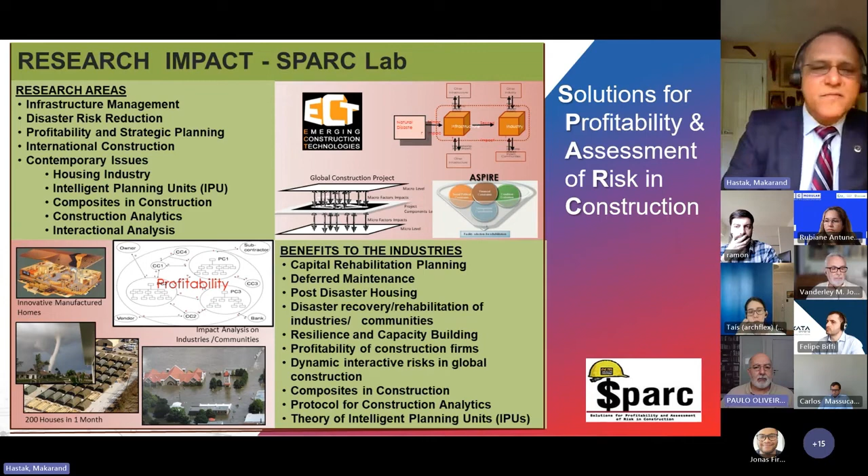Composite applications in construction, construction analytics, interactional analysis. A lot of these research, mostly in the housing industry, intelligent planning units, composite applications, leads to more modular construction. So we have dealt with that quite extensively over the past years. As you can see, a number of benefits have come out of this research. But this is just showing primarily all the areas that I've worked in.

But today, I would like to share with you some of the results we have in terms of people, process, and technology roadmap for offsite modular construction, and a theory that we introduced a few years back called the theory of intelligent planning units, which I believe would be the next stage of modular construction, and something that we can all think about.

Talking about CII, perhaps many of you already know, but CII stands for the Construction Industry Institute. It is based out of UT Austin, University of Texas at Austin, and it was started in 1983 by some of the faculty, who got together with the industry, and the idea was to do research for the industry and identify what are some of the issues that the construction industry might be facing, and how can we resolve that. So there's industry partners, there's of course academia and the government, and they identify research needs, research topics, and then as academics we bid on those projects, and if successful, then you engage in at least a 2-year project with about 20 different companies on your team.

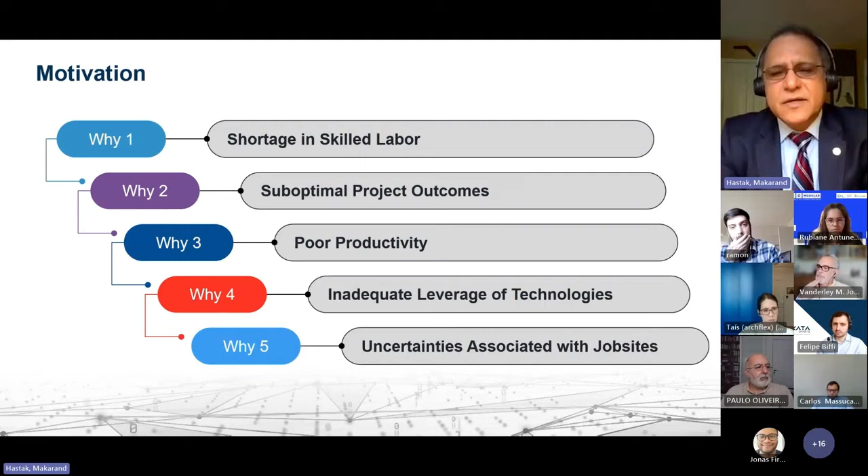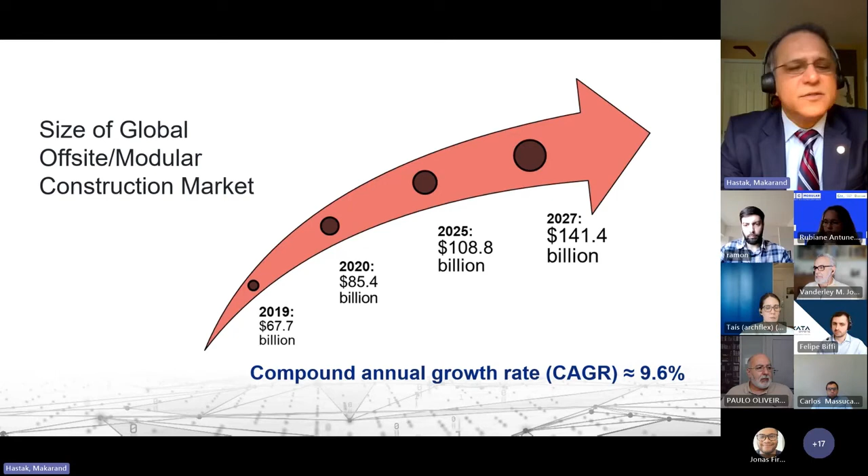The good part is that the size of the global offsite modular construction market has a very positive trajectory, as you can see, where the compound annual growth rate is almost 10%. So that is indeed excellent, and from the positive trajectory, you can see that that trend is likely to continue. And I'll talk about some of the reasons that we found why that trend is also important for us in the industry.

As I mentioned, we started this research shortly before the pandemic, and then we were meeting as a team. I had about 18 or 20 different companies represented on the team, and we had to meet online like we are doing now, and try to complete this research project.

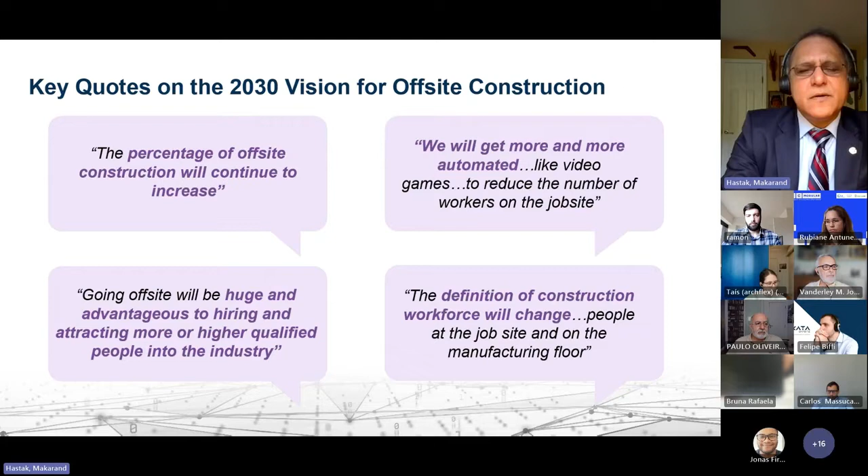So we are talking to different companies, different owners, and different contractors that have used modular construction. And as you can see, their vision for 2030 for offsite construction. And again, it was overwhelming response that in the future, because of all the issues that I mentioned earlier, including skilled workforce requirement for offsite construction, improved productivity, that we will see more and more of offsite construction as we move from 2020 to 2030. So indeed, a very positive indication for this segment of the construction industry.

So in conducting the research, we went through a lot of the typical steps that we would expect, and that included literature review, of course, what has been done. I mentioned about CII having done a lot of research over the past 30 years. We did a survey of all the experts in the industry. About 100 responses were received from companies of different sizes, vendors, owners, contractors, suppliers, and manufacturers, of course. Then we did also semi-structured interviews of a select group of professionals. We did case studies on top of that for application of modular construction.

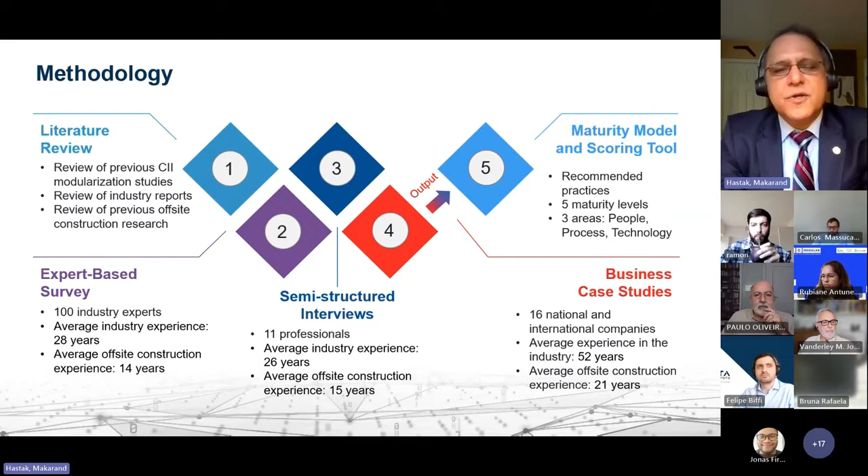And in the end, we came up with what we call a maturity model and a scoring tool that shows what is the strength of off-site modular construction as far as your company is concerned, and how you can identify how mature your company is in adopting some of these practices. The result of which was, as you can imagine, a roadmap.

And instead of just talking about people, as the title might indicate, we also looked at process and technology, because all three of those elements need to go hand in hand. And we came up with the roadmap that would indicate what would be the workforce requirements, what type of process implementations we will have to think about, and what type of technology would be needed and is currently available.

So starting with people then, let me point out the top 3 workforce occupations in the highest need for training in offsite construction. And you can see that we identified 5 different categories. Those are design and engineering, construction and management, administrative, on-site craft, and then off-site fabrication. As you all know, we need to have a good strength off-site as well as on-site to make modular construction, off-site construction most effective.

So the next 3 columns you'll see are indicating the top 3 workforce occupations in that particular category. So design and engineering, for instance, BIM, 3D, 4D modeling, QA/QC, planning engineers; in construction and management, construction managers, of course, constructability specialists, field interface personnel; on-site craft, for instance, required off-site module installation personnel, lifting cranes and rigging personnel, instrumentation, and so on.

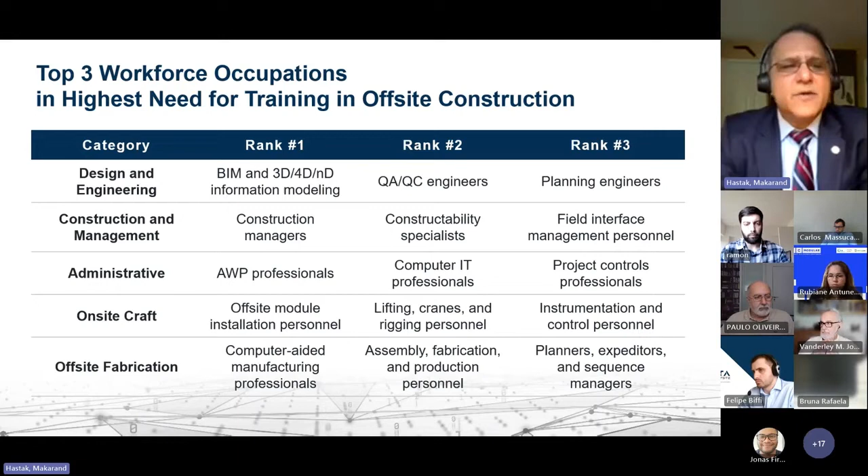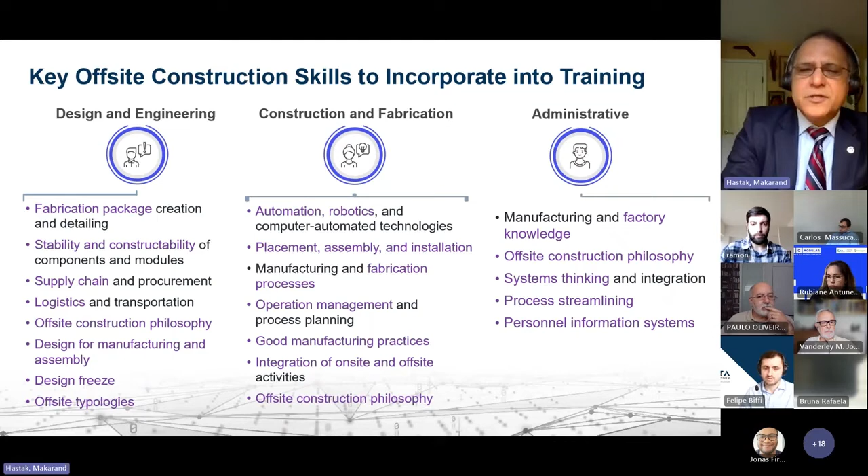So in addition to this skill set, there were some advantages. I think with offsite construction, there's more opportunity for workforce diversity. And as you can see, these are percent numbers, but you can definitely see improvement in engagement and diversity in the workforce that might be feasible with offsite construction, where we can provide a more controlled environment for the workforce and different skill sets can be attracted to the industry. So there's a lot of potential in terms of improving the skill sets and the demographics of the construction industry.

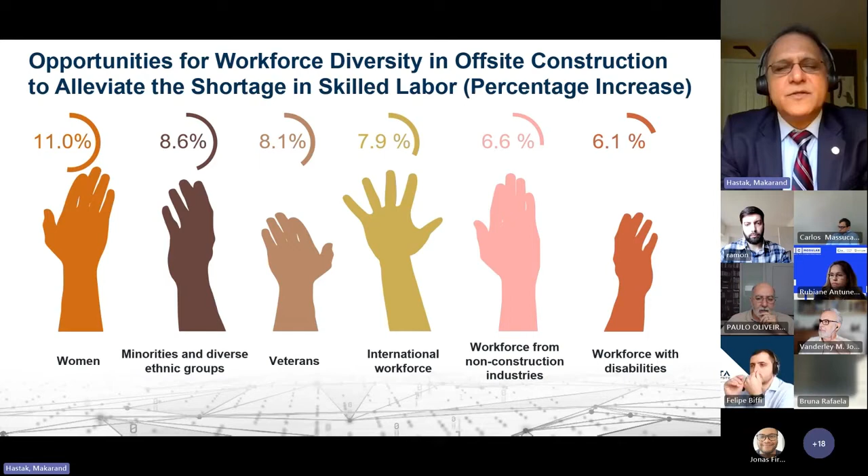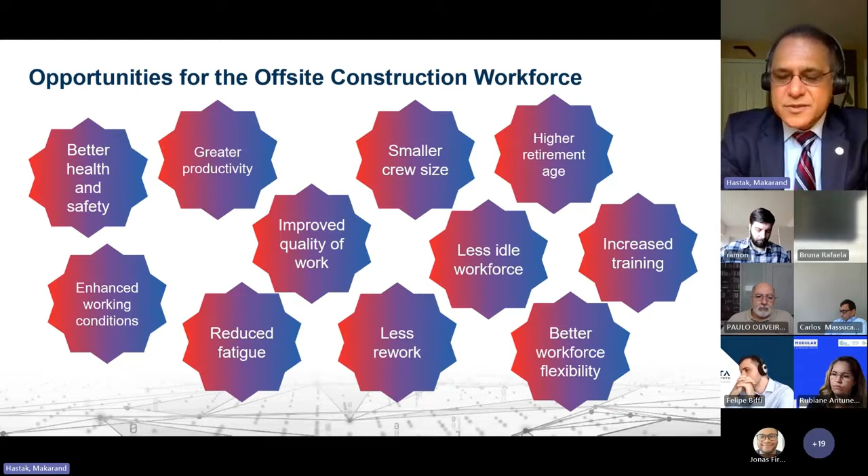Then, so what are the opportunities for offsite construction? As you can see, better health and safety, greater productivity, enhanced working conditions, reduced fatigue, smaller crew size, less rework, and so on. So I know that you all are engaged in modular construction, so many of those things, of course, you are familiar with. But let me talk about process.

In terms of process, the improvements that we found, future growth in offsite construction process from 2020 to 2030, and 2030 is not too far from now, just a few years away. But 87% of the practitioners expect an increase in offsite construction. There will be a 21% average increase in offsite construction, and about a 7% average increase in fully automated offsite construction activities. So definitely much more emphasis on offsite modular construction is likely to be seen by the time we hit 2030.

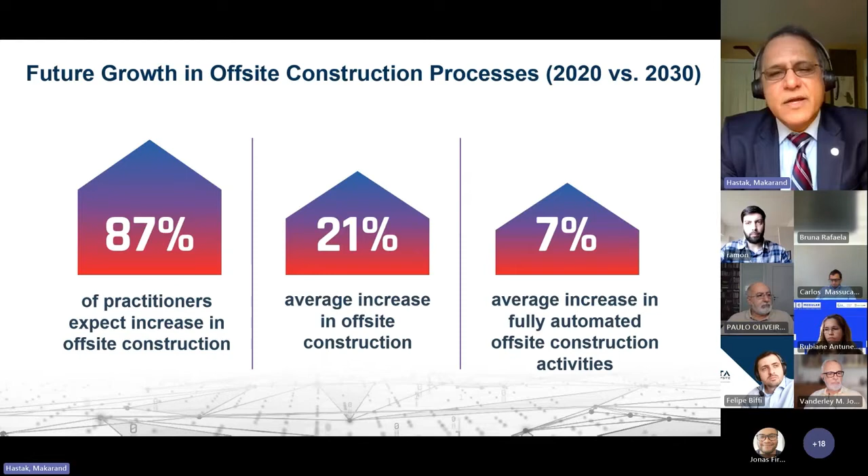You might also know that, by 2030, we are expecting to lose about 41% of the construction workforce in the United States. And with the pandemic already influencing availability of skilled workforce, and by 2030, if we're going to lose 41% of the workforce on top of that, that is a serious consideration that, at least in the United States, we need to be thinking about in terms of what changes we need to implement so that we can take more advantage of modular and offsite construction.

So what are the different characteristics? In 2020, we focus more on single trade, prefabrication, customized components, permanent structures, single skill labor, high skill labor. But by 2030, it's likely to be more modularization, standardized components, portable, relocatable structures, multi-skilled labor force, and high-skilled labor force. So clearly, the training requirements, if we now think from an academic perspective and from a training workforce perspective, we will have to think about how we can train these individuals so that it becomes seamless.

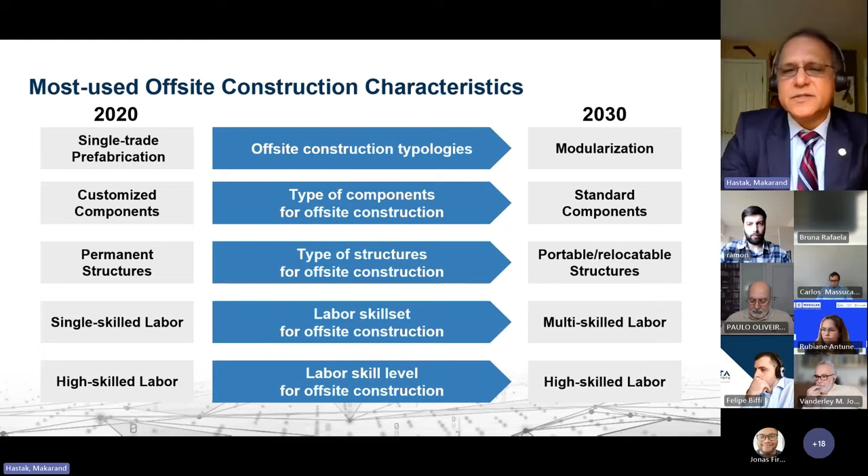As modules are created in the factory environment or offsite environment, and as they come to the work site, we almost have a plug and play type of design so that it becomes seamless in terms of constructability and making facilities feasible. So, there are a lot of lessons to be learned. There are certain lessons, and of course, there are pain points as well.

And the lessons learned, of course, are, we get an experienced integrated offsite team. That is a requirement. Adapt and work within the offsite framework. So our philosophy needs to be a complete offsite construction thought process. We need to provide basic training for the workforce. Of course, reward and incentive mechanisms for the offsite workforce as well.

But some of the pain points would be, currently at least, immature processes, inconsistent implementation of offsite construction. If the offsite philosophy in a particular organization is not robust, then they're likely to still be thinking on-site construction and wanting to implement a few modular components. And that defeats the objective of moving construction offsite. So lack of detailed offsite design solutions, of course, late offsite construction decisions that might delay the lead time, might delay the supply chain process, and so on.

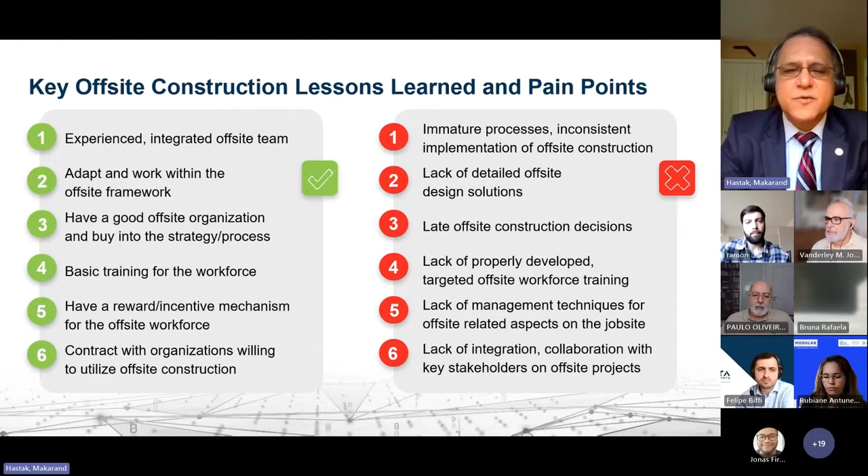So clearly, the benefits are plenty, and you all know those very well. So in terms of workforce, 50 to 60% of stick-built can be moved to offsite construction. Labor costs can be reduced. We might expect improved productivity because of the factory environment. We can reduce safety incidents. Quality could be improved as well. Less disruption, and perhaps more saving in time also.

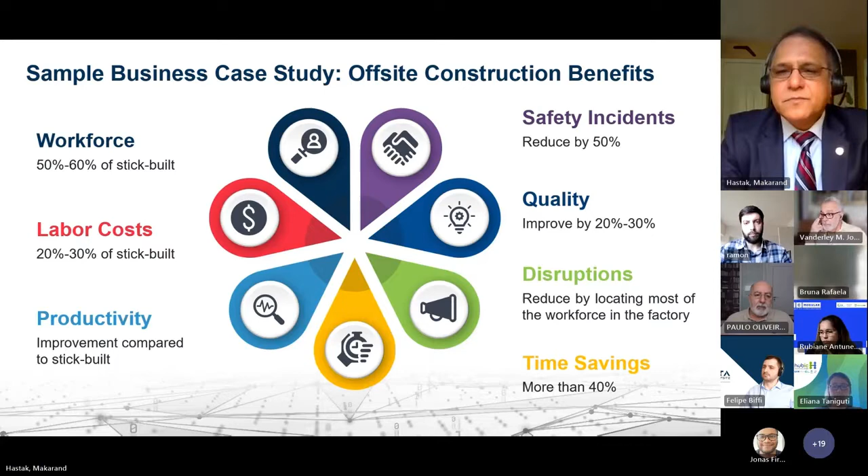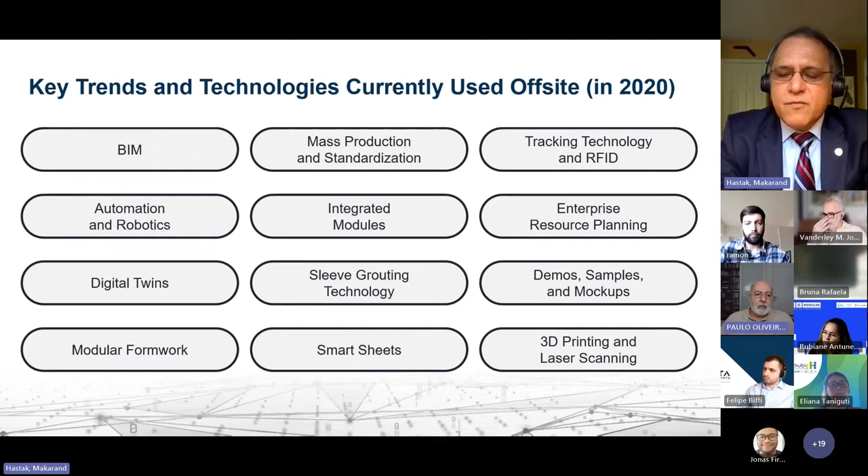But what we found also is that by 2030, the technologies we are likely to see more would be remote monitoring, use of smart sensors, use of artificial intelligence interface, extended reality, integrated real-time management information systems, and a few more. So the question that comes to mind is, is our industry ready? We went through Industry 4.0 or Construction 4.0, but there's also Industry 5.0. So how is that to be integrated when we're thinking in terms of modular construction moving towards 2030?

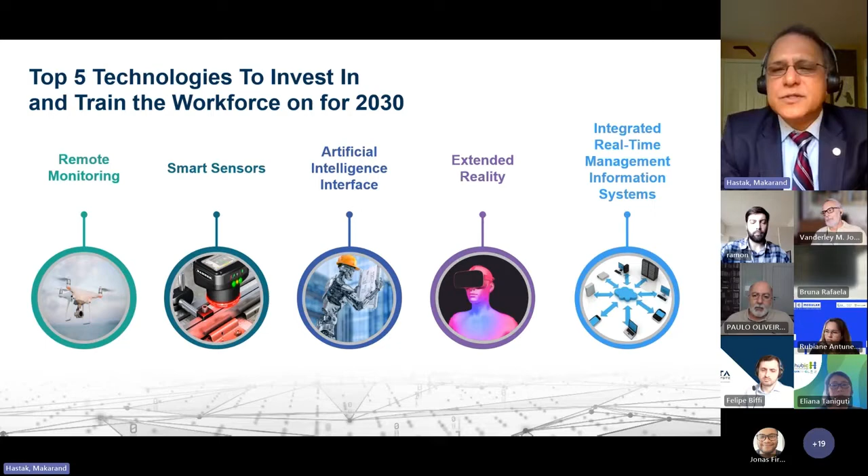So what we did was we came up with a maturity model and a scoring tool to assess where we stand at present in terms of modular offsite construction. And I'll quickly share with you what this maturity model is. There are 5 levels. Initial level, 6 months to 1 year into implementation of modular or offsite construction. Repeatable, defined, managed, optimizing. So these are the 5 levels a company would go through in implementing the offsite philosophy, modular philosophy, within their thought process.

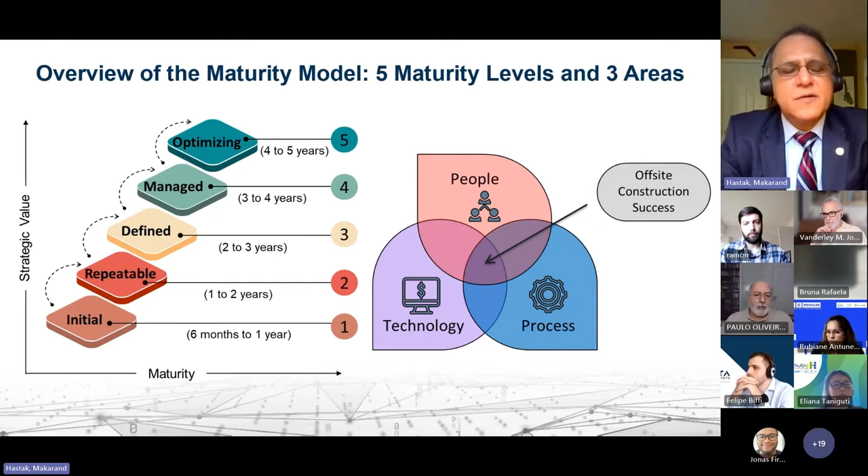And indeed, looking from 3 perspectives, as I pointed out, people, process, and technology, and how mature our organization is in terms of implementing some of the offsite philosophies. So in terms of the meaning of each of these maturity levels, at the initial level the organization has its offsite construction development disorganized, and as you move further up the scale, level 5, for instance, the organization realizes the full offsite potential and constantly looks for improvement. So that's the range in which we have designed this maturity model.

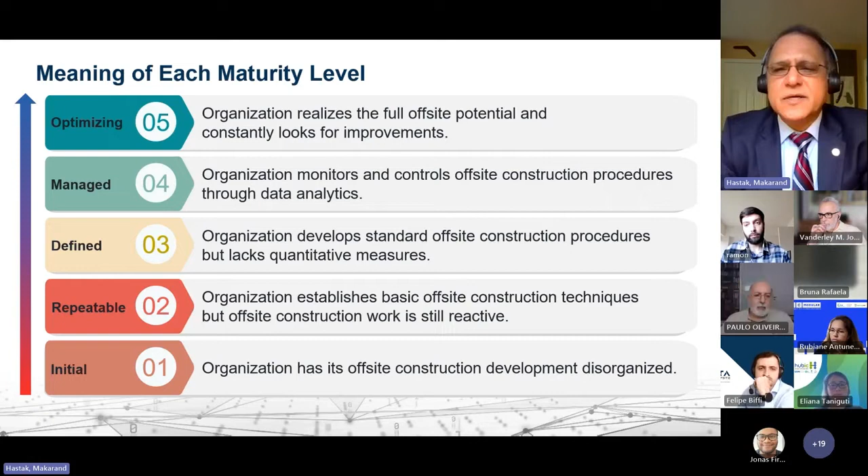If you look at some of the attributes, again, under the 5 maturity levels of initial, repeatable, defined, managed, and optimizing, you'll see the expectations from people, process, and technology as you move up the maturity level, from the initial level to the optimizing level. So for instance, in terms of people, initially you would require training, provide soft skills and technical skills to your workforce. But as you start maturing, you might have regional centers of excellence within your organization already looking at the next steps in modular thought process and how to improve your own profitability.

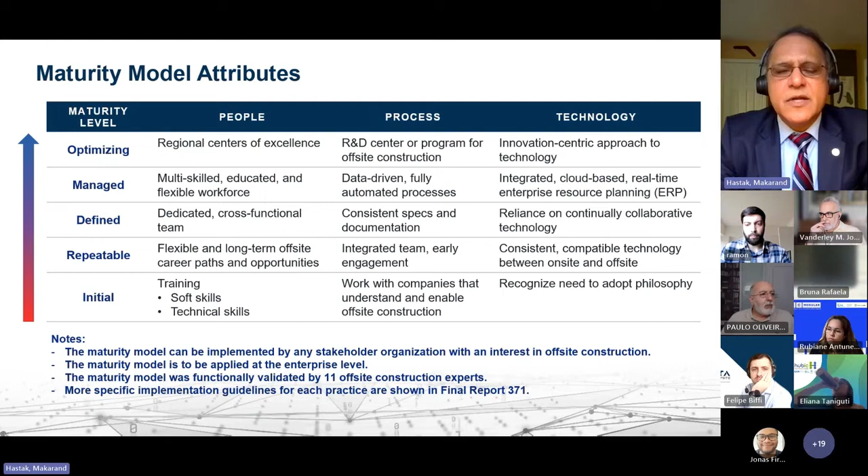In terms of process, again, starting with the initial level, work with companies that understand and enable offsite construction. You're still in a learning process, but as you mature, you might have R&D centers or programs for offsite construction within your organization or as a consortium of organizations. Same thing with technology: recognize the need to adopt the offsite philosophy, versus an innovation-centric approach to technologies, where you're not only implementing advanced technologies, but also thinking ahead of how we can make the most use of upcoming technology and research to improve profitability in our companies.

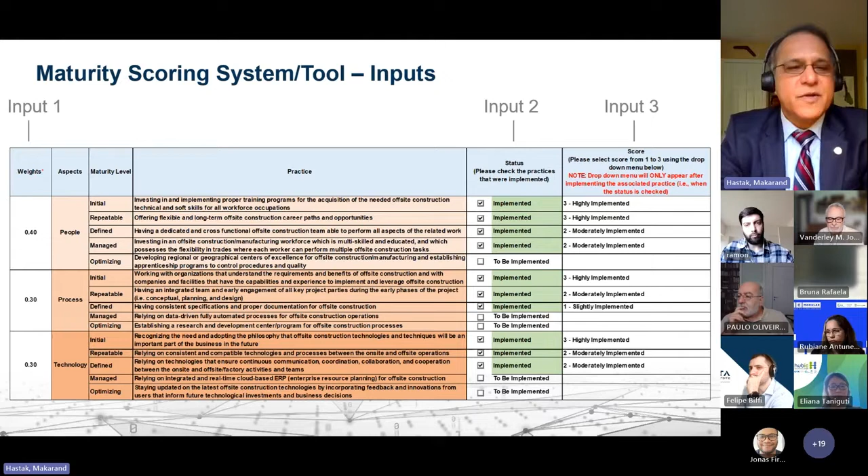Just to give you an idea, multiple inputs are required from the user. I know the font is probably too small to read each detail, but what we're looking for is different weights to people, process, technology within your organization, and input about the status of the different practices, as you can see listed there. This is just a partial listing, and then the score from 1 to 5, or from 1 to 3 using the drop-down menu, that you can scale. Where does your company stand with respect to these practices?

There are 5 outputs that we get from the model in terms of score for people, score for process, and a score for technology as the 3 important things. And the score is from 0 to 15. So the 5 stages, 3 points per stage, sort of.

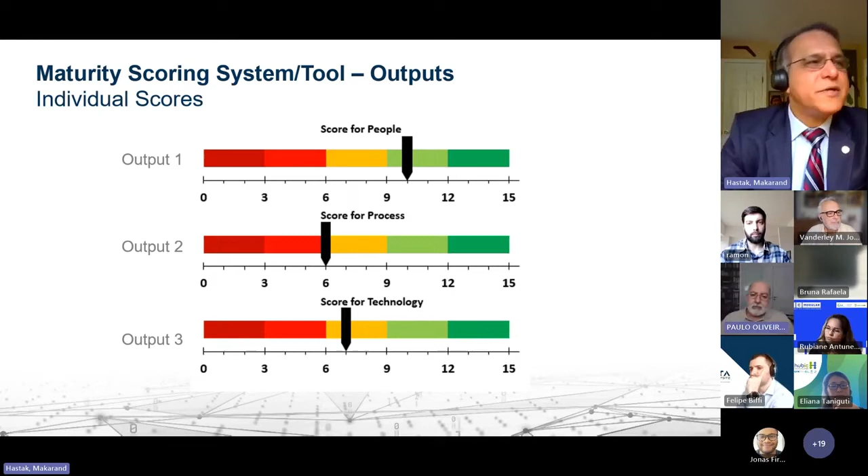So clearly there is a call for action. 2030, as I mentioned, is not too far away. So clearly we need to take advantage of the growth benefits that I mentioned. The CAGR is about 10%, and that is indeed an opportunity for all of us. Follow the roadmap to improve project outcomes. There are certainly guidelines that are coming from the industry participants. And of course, we don't want to stand still and fall behind.

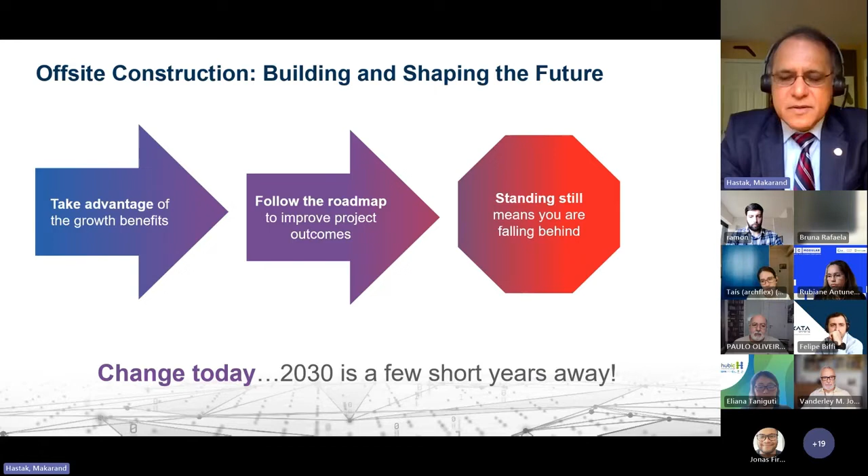Construction, as I mentioned before, is known for late adoption of technology and low productivity. So as compared to manufacturing, here is an opportunity, I believe, that we all need to adopt and move forward. A little bit about the report that I mentioned. This is the CII report RT 371. And you can see that there are 12 different elements that are covered in that report. It's quite extensive in terms of documenting where the industry stands and some of the results that I just shared with you. And if you like, please approach CII to get your own copy.

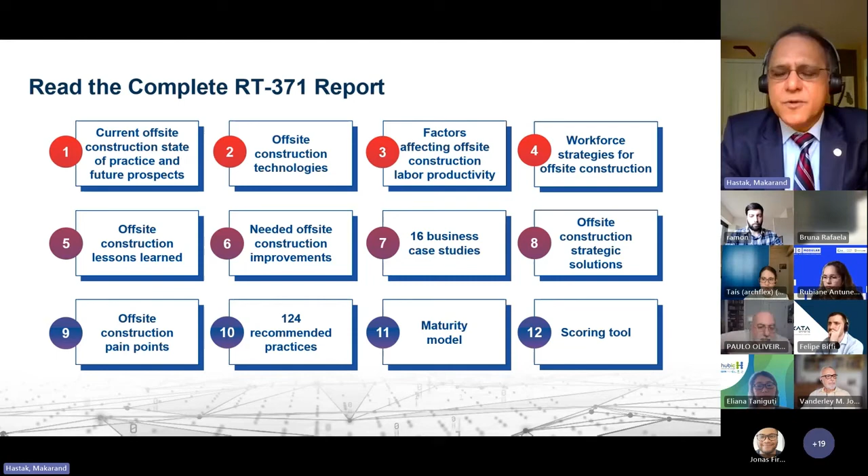But having said that, I also mentioned just a few minutes ago that so far we have reached maybe construction 4.0 or industry 4.0. But as you all know, industry 5.0 was recently introduced, which has a slightly different focus. The focus is now more human-centric, promoting talent, diversity, empowerment, resilience of the industry, and of course sustainable aspects. You are also aware of the UN Sustainable Development Goals; out of the 17 SDGs, I think about 8 or 9 of them relate very well to our industry. So I believe that offsite modular construction has a lot of role to play in achieving many of these objectives.

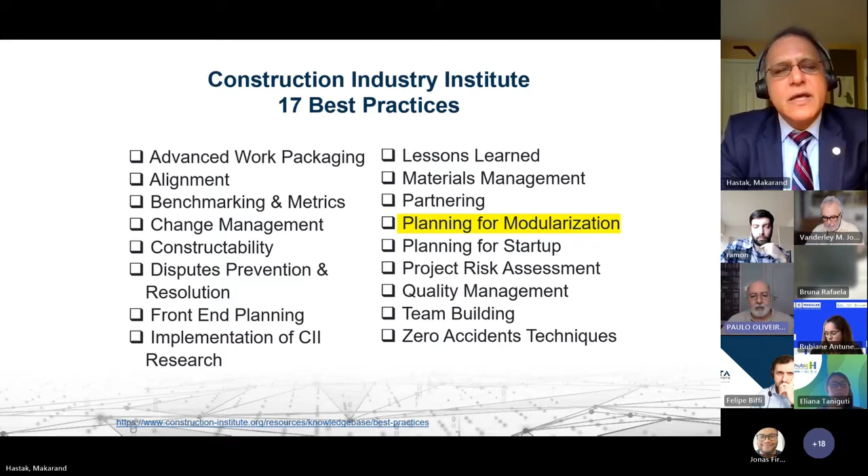But with the recent research that I shared with you, the emphasis is now all across the industry in terms of adopting the philosophy of off-site modular construction and how that is going to impact the nature of training required, the workforce requirement, and of course, the implementation of that. So, we are also engaged in research in that area. And I want to share with you a theory that we proposed a few years back. Actually, it was published in 2017, what we call the theory of intelligent planning units. And what do we mean by that? So let me walk you through what we mean by intelligent planning units and how that is going to transform our industry in terms of modular thinking, in terms of off-site thinking.

So as you all know, the dynamic nature of our business makes it very difficult to establish a streamlined flow in the construction process. It makes it difficult to optimize the required resources in terms of labor, material, equipment, and so on. Meeting the client expectation in terms of cost, quality, safety, etc., often becomes difficult. We always say that each project is different, so we start thinking from scratch. But of course, from a modular perspective, there are synergies that could be adopted from project to project. So there is clearly a need for reducing this complexity in some ways.

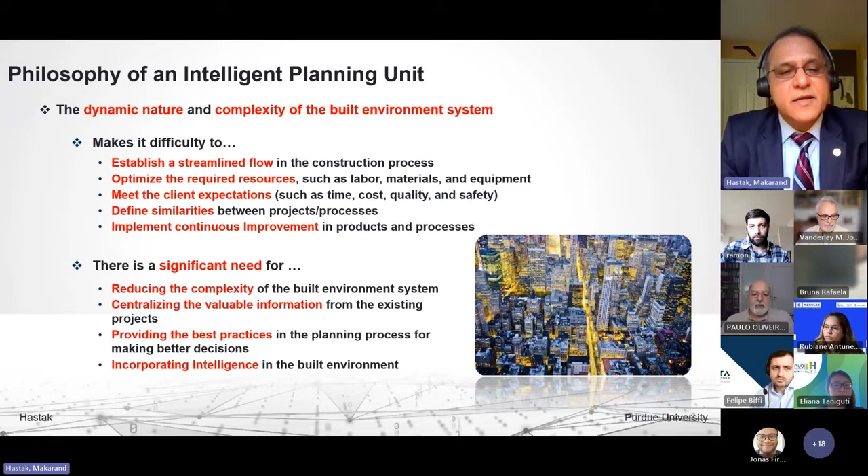It will be great if we can centralize the valuable information from existing projects and look at some of the repeatability concepts, providing best practices in the planning process for making better decisions, and then of course incorporating intelligence in the built environment. So the way it started was, we started to ask a question: how can we enable complex built environment systems to be more intelligent? What do we need to do to reduce the complexity in our business in the construction industry? So we started this research almost 15, 20 years ago.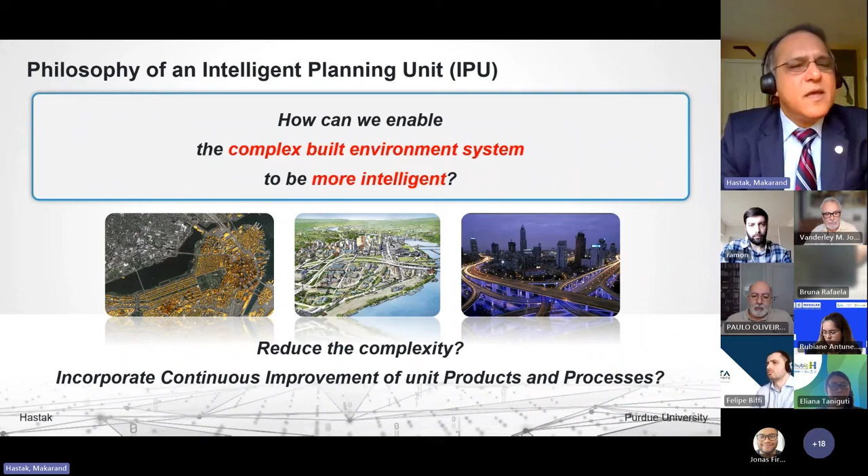And the question that we were asking was, we're looking at nanotechnology. Now, you know that nano is a billionth of a part. And we said, well, in our business, we look at big projects. We look at mega projects. So when you say nano, what does that mean for us? And if I were to ask you that question, you might perhaps say that a billionth of a part might be a brick. So if a brick is that nanoparticle for us in the construction industry, then the next question is, how can we make that brick more intelligent? What are the avenues available to make that unit more intelligent?

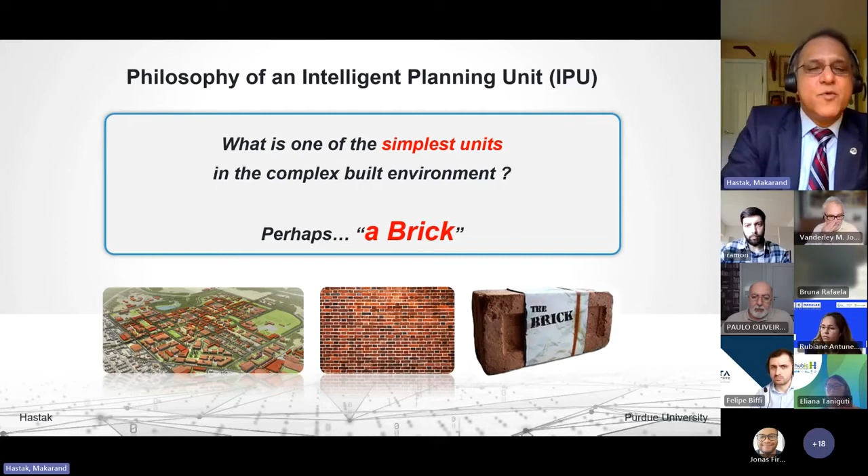And the answer could perhaps be manufacturing composite bricks that implement nanotechnology, and perhaps process optimization at the unit level, that then could be replicated throughout the organization. Now, you might say, well, what does that really mean? So let me explain that further. If you were to take that brick and implement sensors using nanotechnology, and place those bricks strategically, let's say 4 or 5 units in a room wherever you are sitting, then that room itself would be capable of identifying humidity, temperature control, sound, air quality, whatever those sensors are used for. Now, certainly that room is an intelligent planning unit.

And let's say you are sitting in your office, and in your building there are 20 such offices. Now, by optimizing one unit in terms of all the KPIs that you want, or the key performance indicators, you are preparing a unit which could be replicated n number of times.

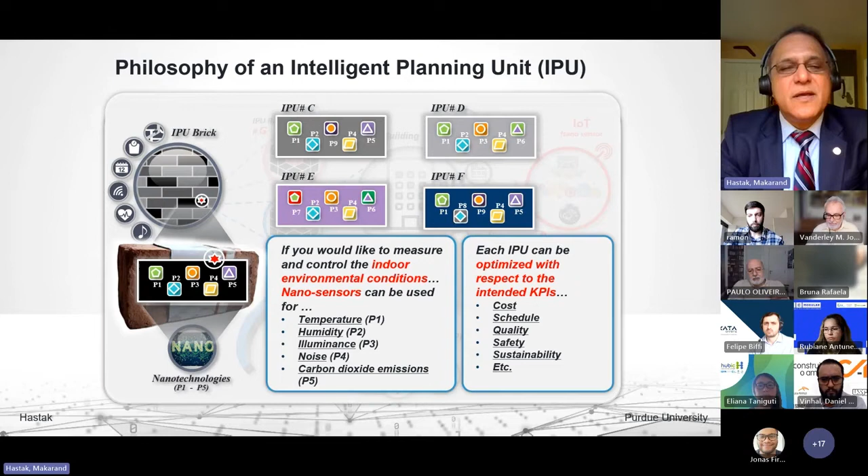So you can see that by implementing a strategic brick as a unit in a wall or in a room, you certainly have an intelligent room, which then could be expanded to a building, to a campus, to a city, to as far as you want to take it. So that is the concept in short of what we mean by intelligent planning unit. The same thing can be done in terms of process also, and I'll take some examples a little bit later to explain what I mean by that.

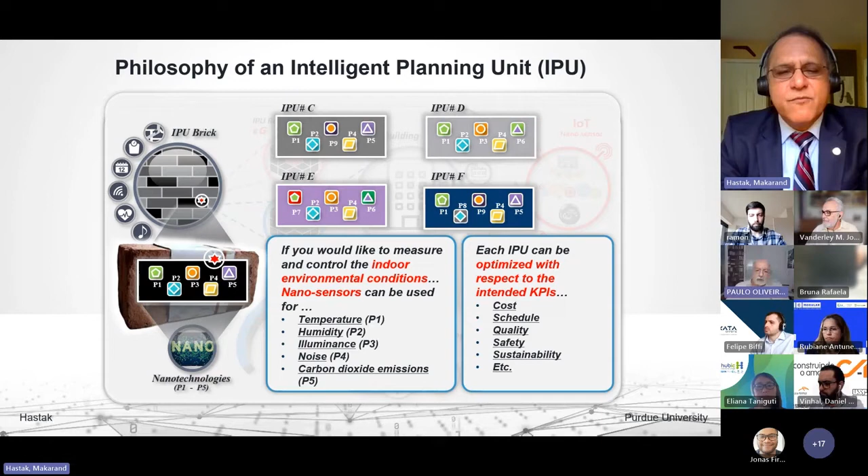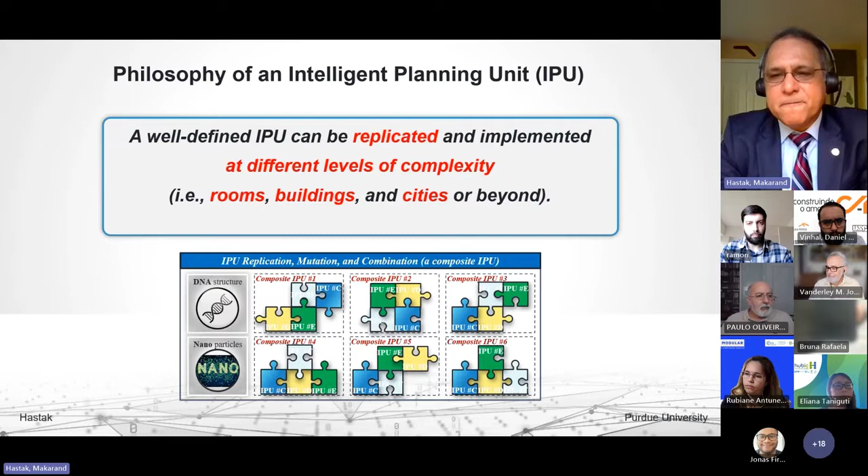So in the same way, if we can identify units that are repeatable in our facility, then by combining them, we can prepare composite intelligent planning units that can be replicated n number of times in that particular facility. So that's really the concept of intelligent planning units. IPUs can be implemented, of course, in the real world. We can improve those through a refinement process.

So if we adopt the intelligent planning unit philosophy, it's going to disrupt the industry. Now, instead of an architect designing every building from scratch, they would perhaps be thinking in terms of what kind of intelligent planning units do I have that could be provided by different vendors that can be incorporated in my building, and I need n number of one type of IPU, and I need 5 of a different type of IPU.

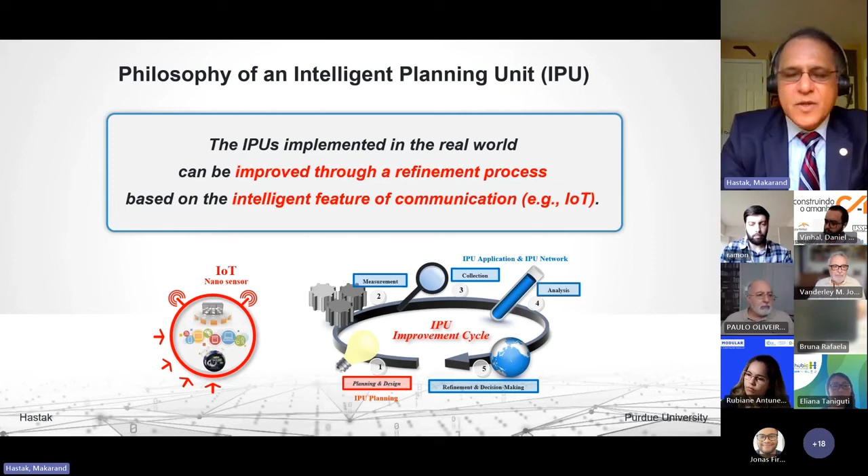Of course, when we think in terms of products, in terms of modules, we know that we can improve those modules from process to process, from one model to the next model, to a third model. So that's really the process of improvement. As I mentioned, you can scale it from a nanoparticle level to a brick to a room to a building to a city, and to any level or any scale that you want.

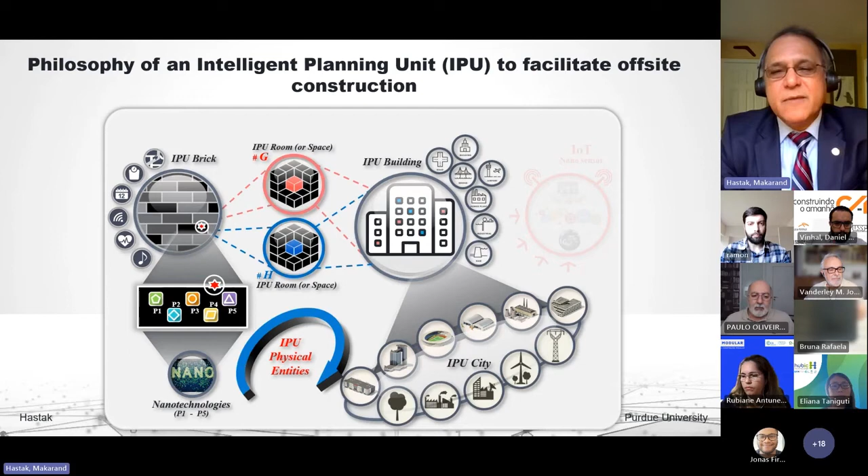What I mean by that is an intelligent planning unit could be at a nanoscale, could be at the scale of a room, could be at the scale of a building, or it could be at the scale of a campus. So these are all scalable concepts that can be implemented. And now with the help of IoT, we can actually integrate all of these modules so they can talk to each other.

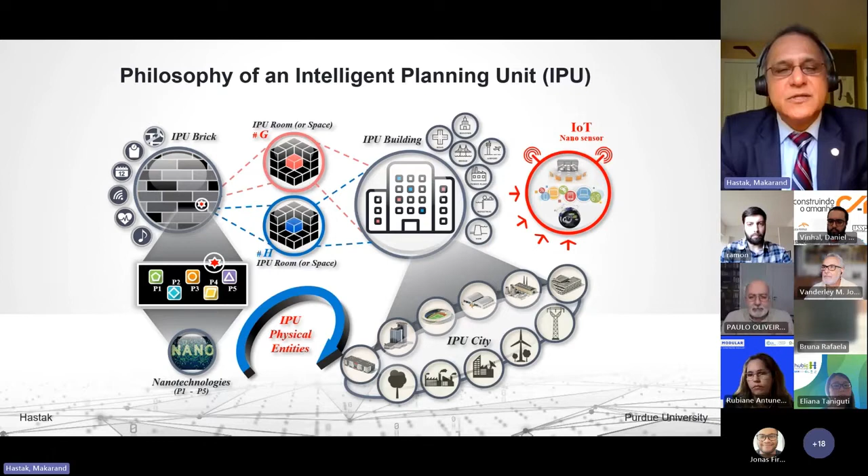For instance, if you have traffic sensors in different parts of the city, you can identify which part of the city is more congested during a particular time of the day, and how you can reroute the traffic so that there is less congestion on the roads. Or you can monitor energy consumption on a campus in different buildings, and how that energy consumption could be minimized by controlling it using IoT and this IPU concept. So it's the scalability of IPUs that is the key, as I pointed out.

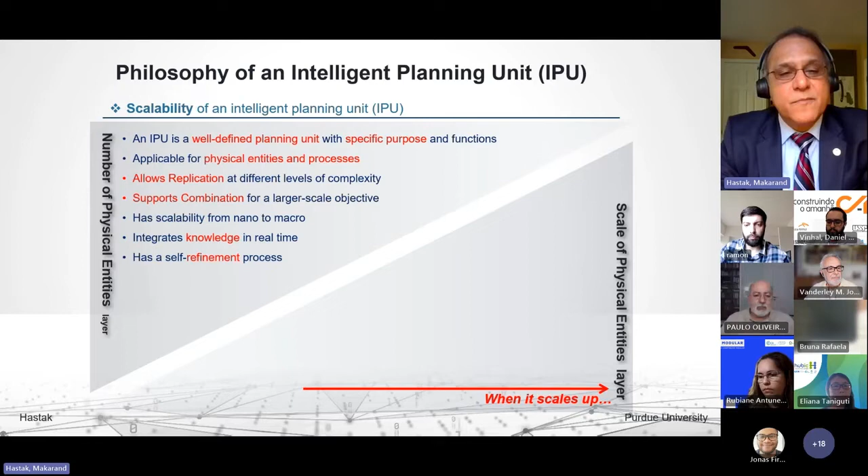An IPU is a well-defined planning unit with a very specific purpose and functions. It's applicable for physical entities, as I mentioned, as well as for process improvements. It allows replication, supports combination, is scalable, is modular in nature, of course, and can be integrated in real time, and so on. So you can scale it, as I've been pointing out, from a nanoparticle level all the way to as much as you want to scale it.

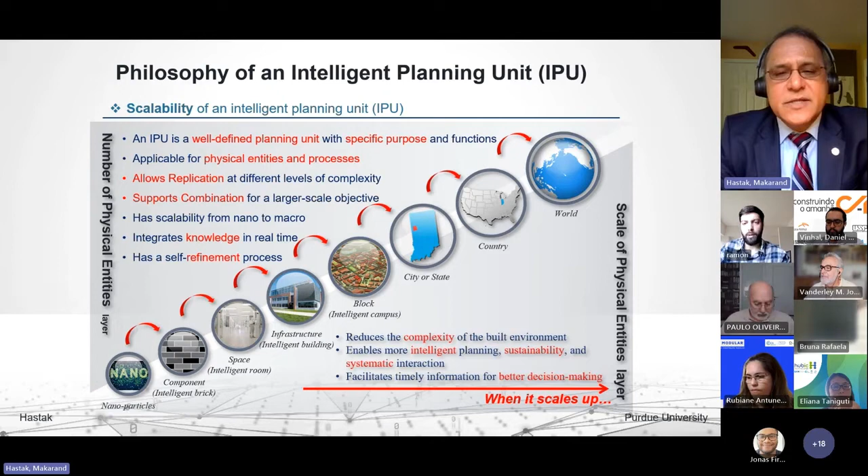Of course, when it scales, it reduces the complexity of the built environment. It enables more intelligent planning, sustainability, and systematic interactions. And it also facilitates timely information for better decision making. So how would I define an intelligent planning unit? Well, it is that physical unit or process which has been optimized in design and purpose, perhaps with sensor technology as appropriate, and can be replicated and implemented at different levels of complexity.

An IPU can be mutated. So if you look at just fenestration, for instance, if it is a south-facing wall or a north-facing wall, then you need different types of fenestration requirements, but that does not change the essential functioning of that IPU, or intelligent planning unit, as a fenestration.

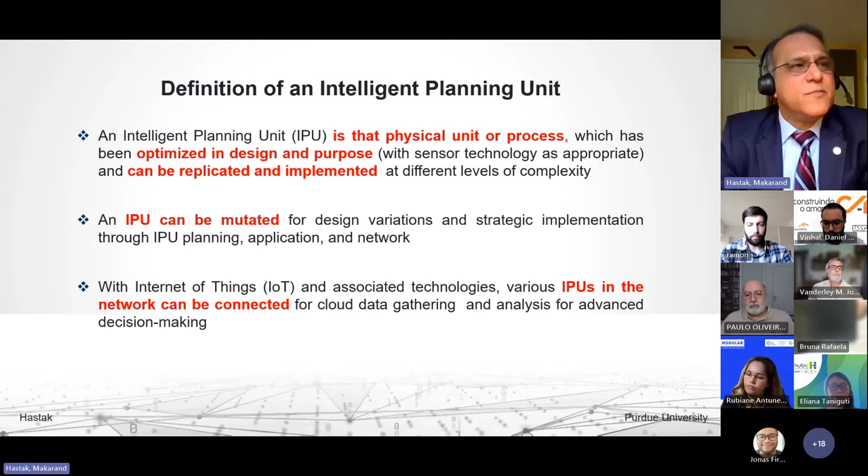And you can mutate that to satisfy your particular requirements. Just like we buy iPhones, or we buy Android phones, or we buy automobiles, we have a certain level of customization that is feasible. Though, as I mentioned, with the Internet of Things, IPUs can be networked in real time, and we can gather information and data. And with the use of data analytics, we can have better control of these modules all throughout the environment.

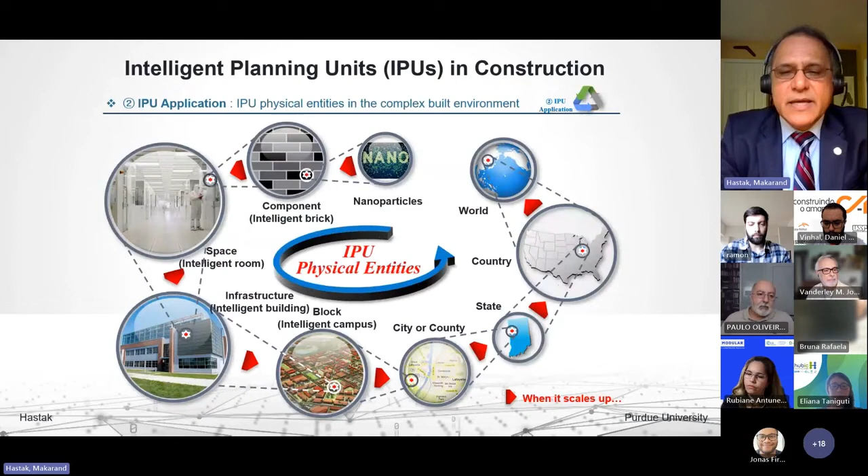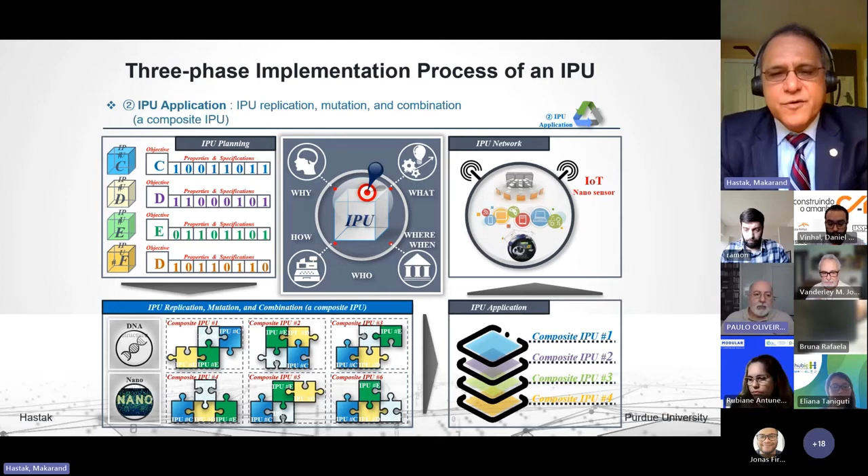So again, scalability from nano level to whatever scale you want to adopt. And as I mentioned, there are three phases of implementation, and one is the IPU application, replication, design. As I mentioned before, each IPU would have a certain design signature, and when you combine these IPUs to form a composite IPU as per the requirements of your facility, then that allows you to plug and play different properties within your facility.

Of course, all of this needs to start from a digital level: the planning and design process, the measurement process, collection of data, analytics, and then refinement. And once we have refined it on a virtual scale, then those models could be implemented easily in the real world.

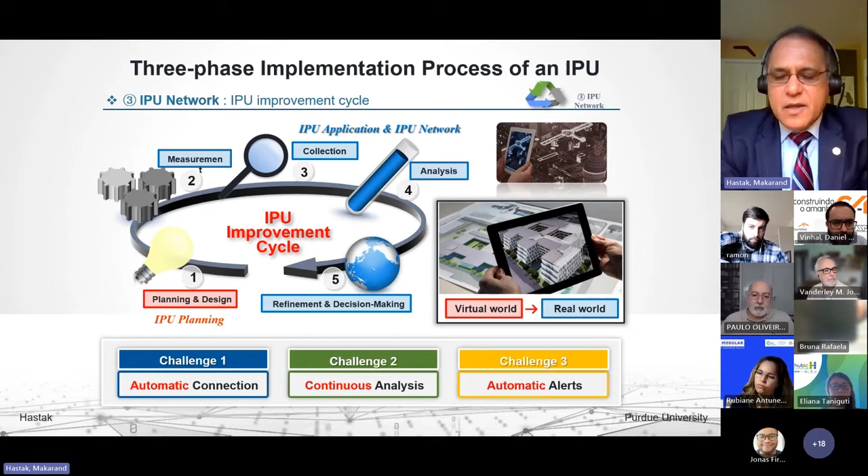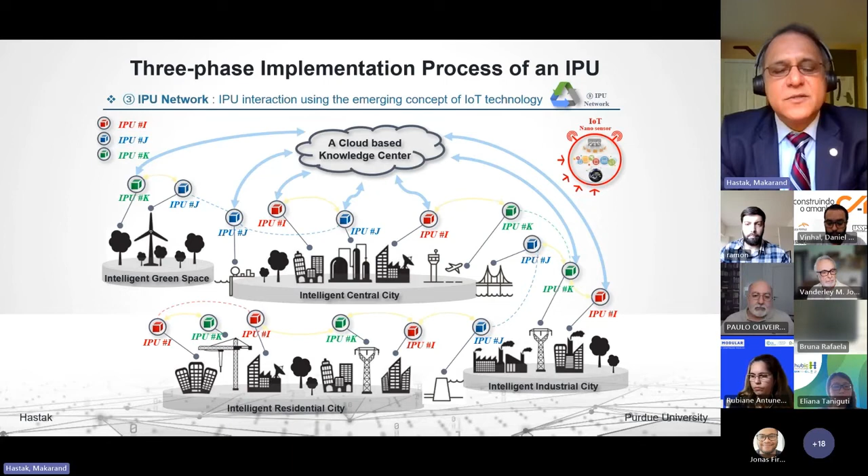Just as an example, you could have an intelligent green space, intelligent central city, or residential city. The different color combinations here indicate different IPUs that have been implemented in different parts of the city that can help you identify whether that is air quality, or congestion, or traffic modulation that you might require during specific times of the day, and so on.

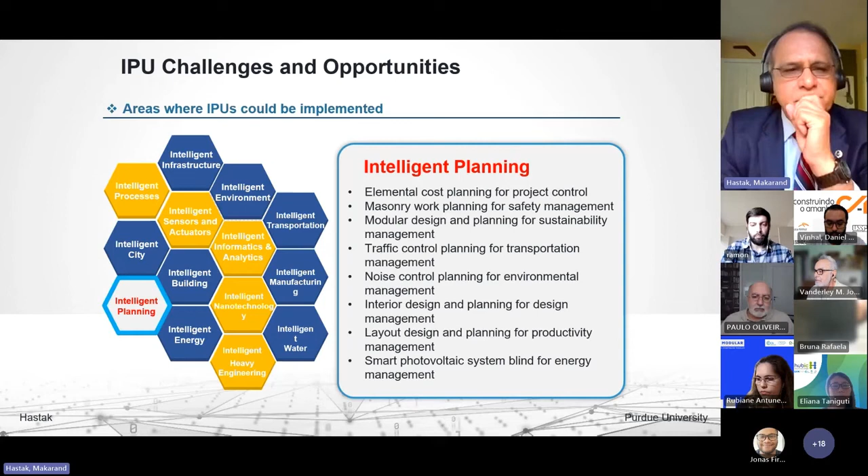I mentioned that the IPU concept could also be used for process improvement. So if you were to consider masonry as an example, and take a certain unit length of masonry within your project, let's say 10 meters of masonry, you can easily identify how many masons you're going to need, how many laborers to support the mason, what type of material in terms of brick, pallets, mortar, etc. would be required, what type of scaffolding is required, what type of safety parameters are necessary, and how you can optimize the cost of that process just for the 10-meter unit length that you might have selected.

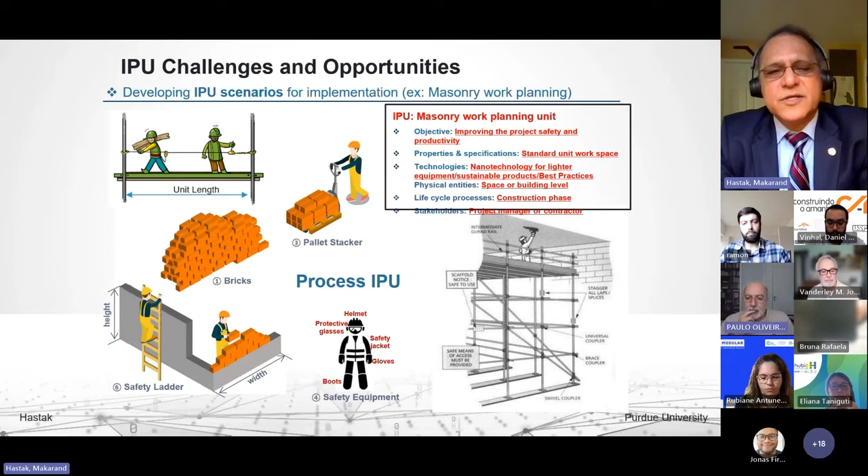And once you have optimized based on all the key performance indicators that you can think about, you know that it is optimized for the 10 meters, and you have hundreds of those meters on your project. So you can easily replicate that unit, that intelligent planning unit, in terms of process within your organization and make it more optimal.

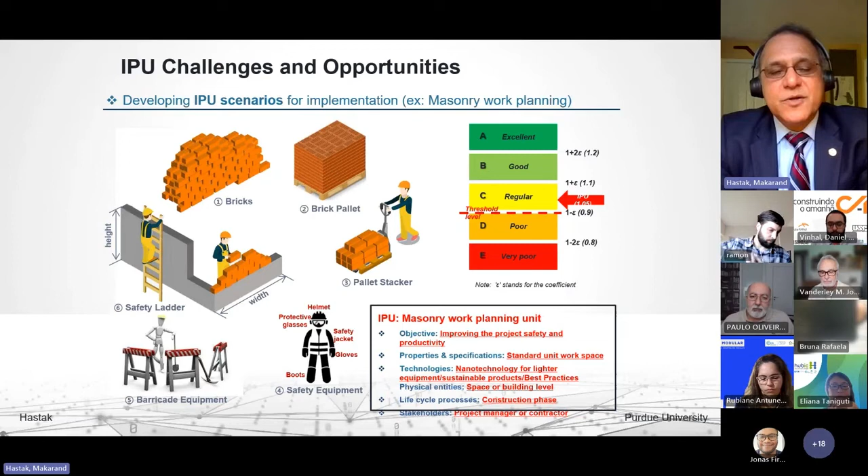We can easily keep track of how you are implementing this concept in terms of poor, very poor, regular, depending on implementation of these IPUs as a philosophy for modular construction. And as I mentioned about KPIs, those could be cost, schedule, quality, safety, sustainability, etc.

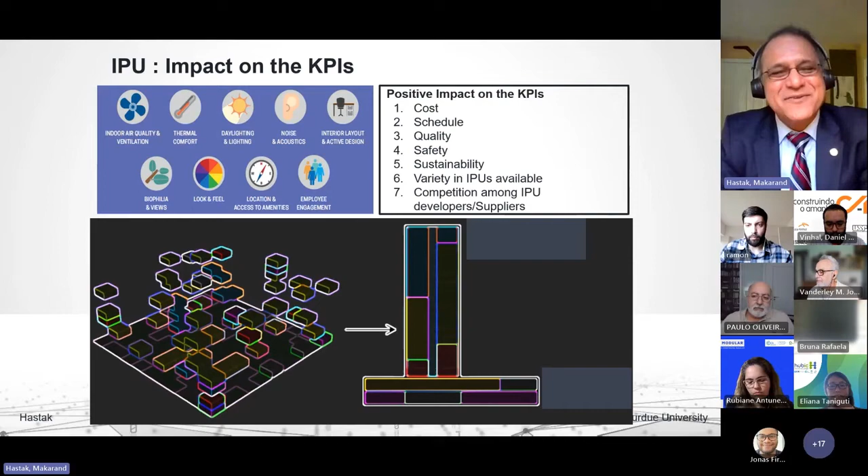So just to put a seed of thought in your mind. With that quick introduction to intelligent planning units and our results that we obtained from the CII research, let me conclude my presentation by saying that I was able to highlight the workforce needs of 2030, how we will be needing more offsite construction, more modular construction, and what type of workforce training would be required.

So towards that, I presented the roadmap of offsite construction in terms of people, process, and technology, and introduced more advanced thought processes in terms of the philosophy of intelligent planning units and how that is likely to disrupt the way that we presently think about each and every project, and how we can think about IPUs in the future and the thought process that would be required.

I illustrated the application of IPUs for future cities and smart construction, and of course highlighted the modular concept, the application of IPU in design process and lean construction, and then the IPU philosophy, as I mentioned, is of course a paradigm shift that could play a major role in the modular construction industry.

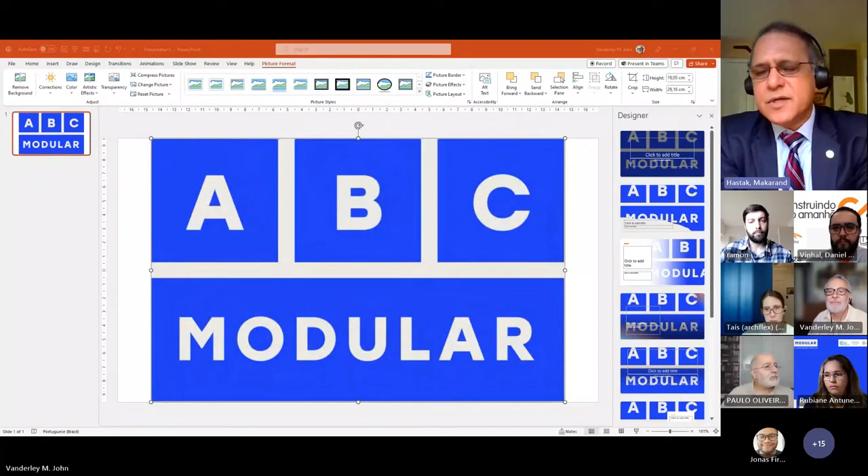We have more questions here regarding the maturity model. Rubiani asked if there is a relationship between the maturity model and risk assessment of companies' business model. Yes, indeed. As I was mentioning earlier, the entire maturity model is pointing at how immersed you are in adopting the philosophy of modular offsite construction. And the maturity model points out whether you have, as an organization, ingrained that philosophy, or are you still thinking about perhaps one module or two modules within the project, and it's not really a modular philosophy that you've adopted, but more of just using a few modules within the construction process.

So the maturity model indeed points out that if you are going to adopt the philosophy of offsite modular construction, then you really need to start as early as possible. You need to make sure that you have a champion within your organization that is going to drive the process, that the philosophy right from the concept stage is offsite and modular, because that is going to influence the risk that you have in terms of supply chain, lead time requirements, and workforce requirements, to make it a true plug and play type of project, where as the modules get shipped to your site, the site is ready, and there are people trained to receive the modules and put them in place. So indeed, it is very much tied to your risk assessment model. I hope that answered the question.